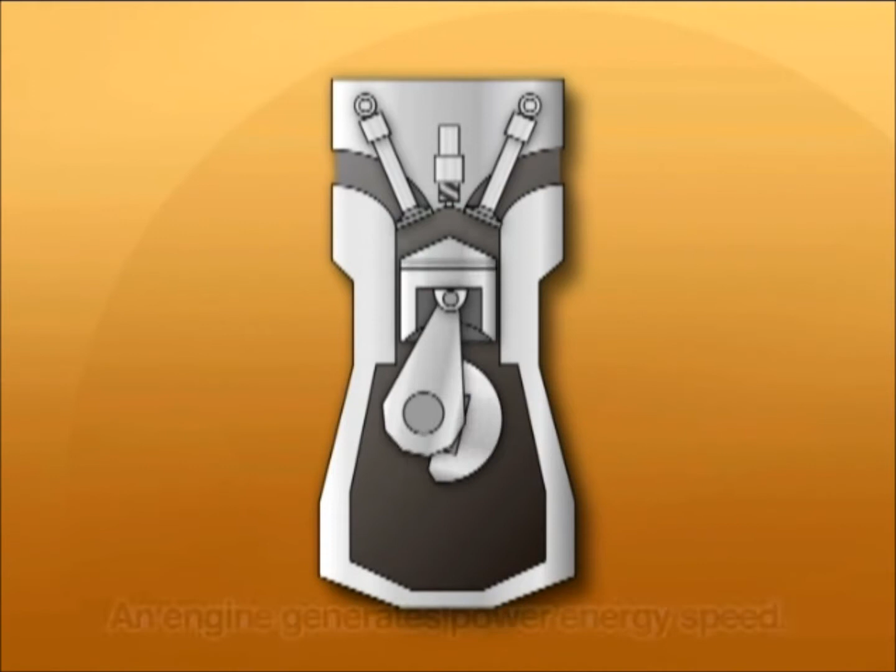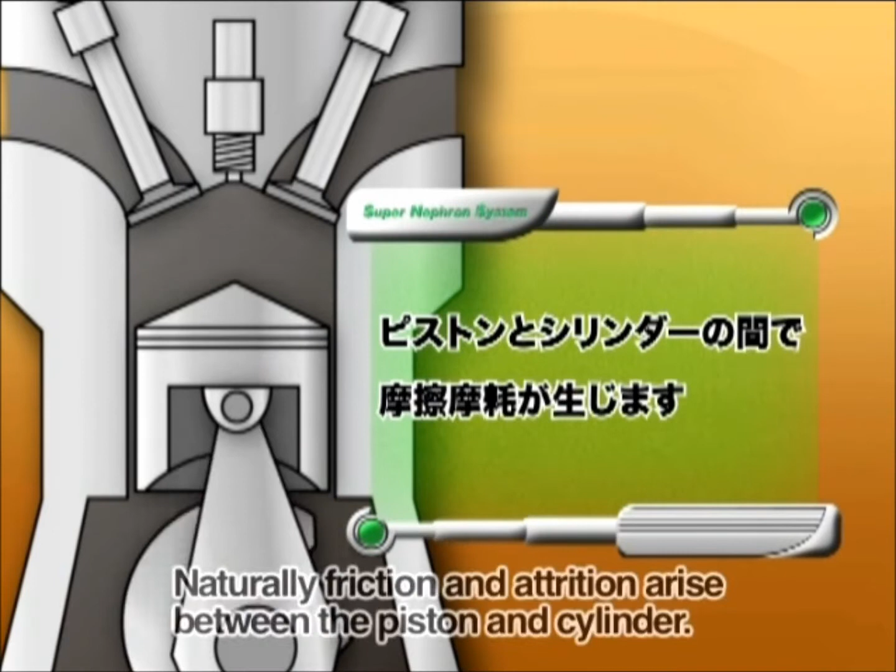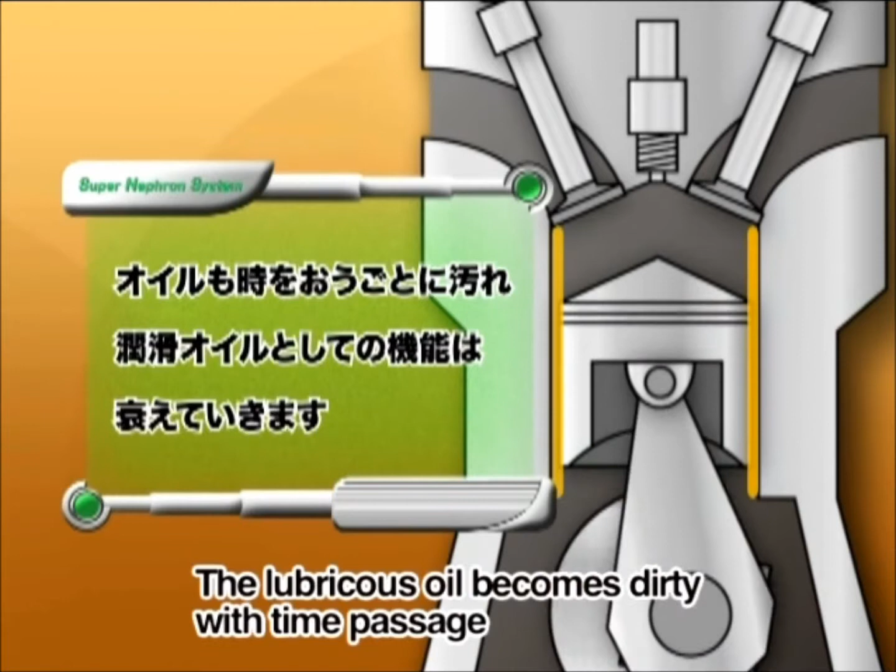First of all, we explain briefly about the role of lubricant oil. Engine generates power energy as the piston inside the cylinder moves upward and downward at the high speed. Naturally enough, the frictional wear occurs between this piston and the cylinder. Lubricant oil plays a role in reducing the frictional wear. Lubricant oil becomes dirty over a period of time and leads to functional decline. For that reason, the continuous use of unclean oil wears off and damages the inner part of the engine, and that deteriorates fuel efficiency and declines power performance and finally leads to engine breakdown.

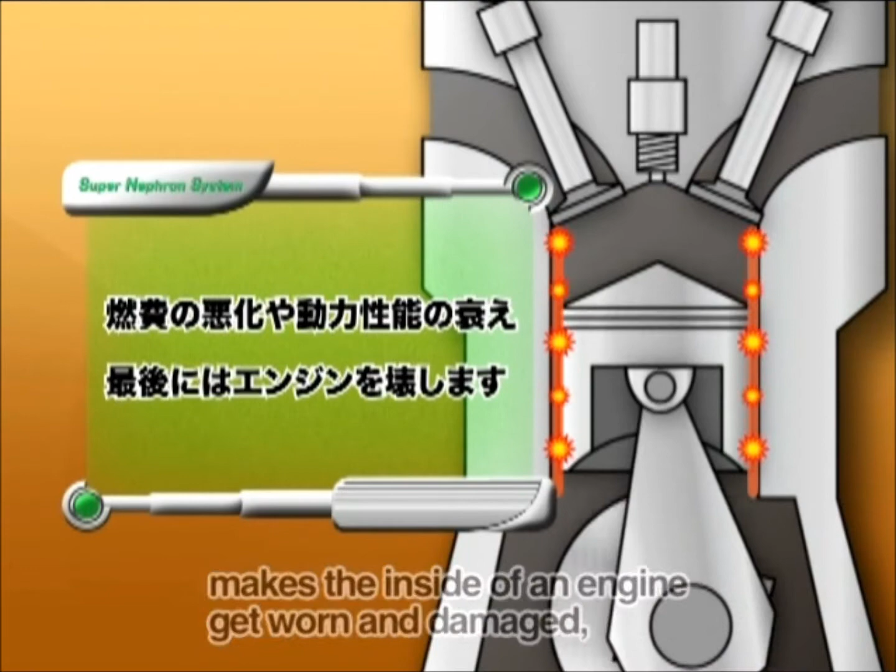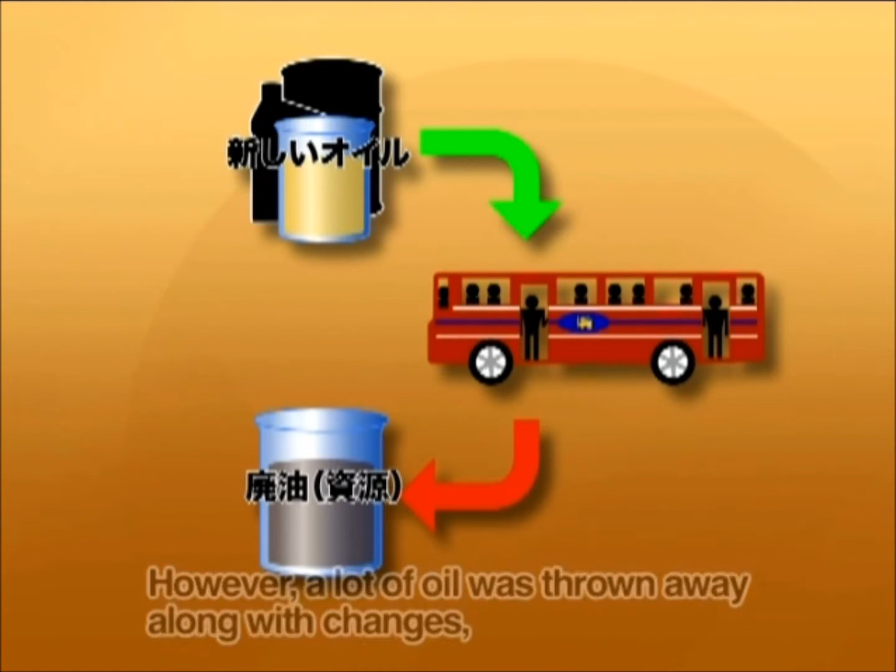In conventional system, lubricant oil change is carried out regularly in order to prevent such problems. However, by doing that, large quantity of oil is thrown away and it becomes financial as well as environmental burden. Super Nephron system clears such large quantity of discarded lubricant oil to zero, and yet it produces the most suitable lubricant oil for engine.

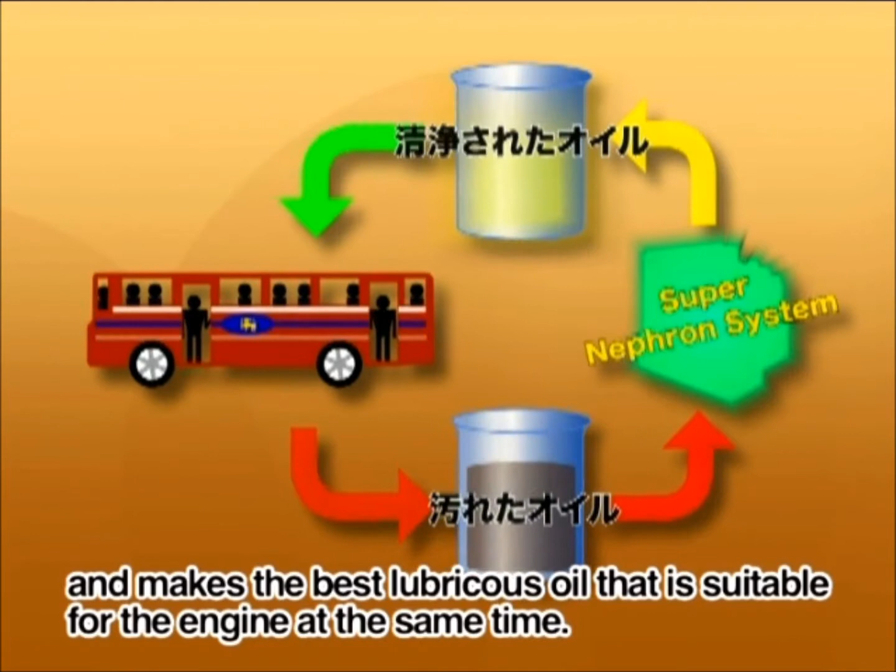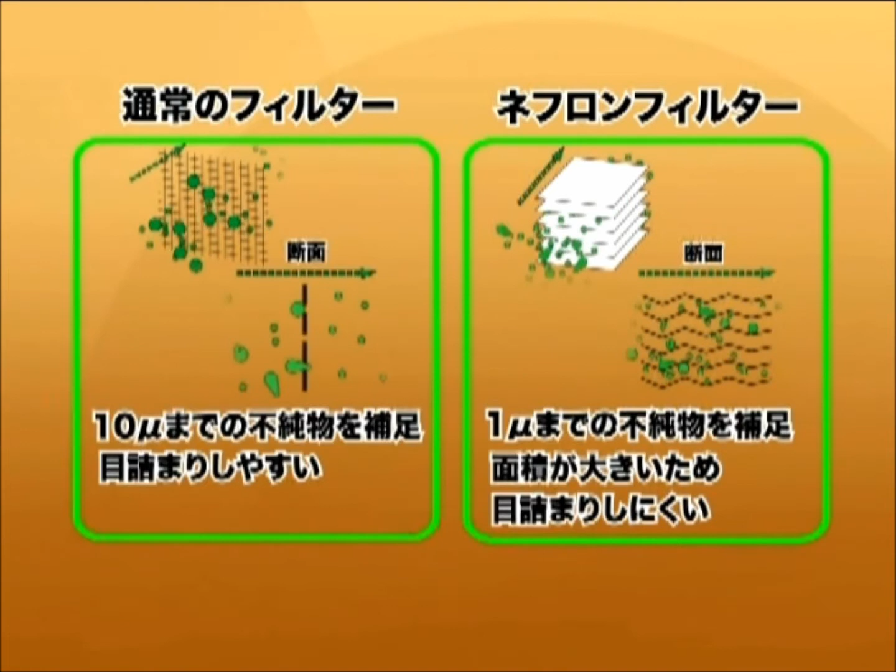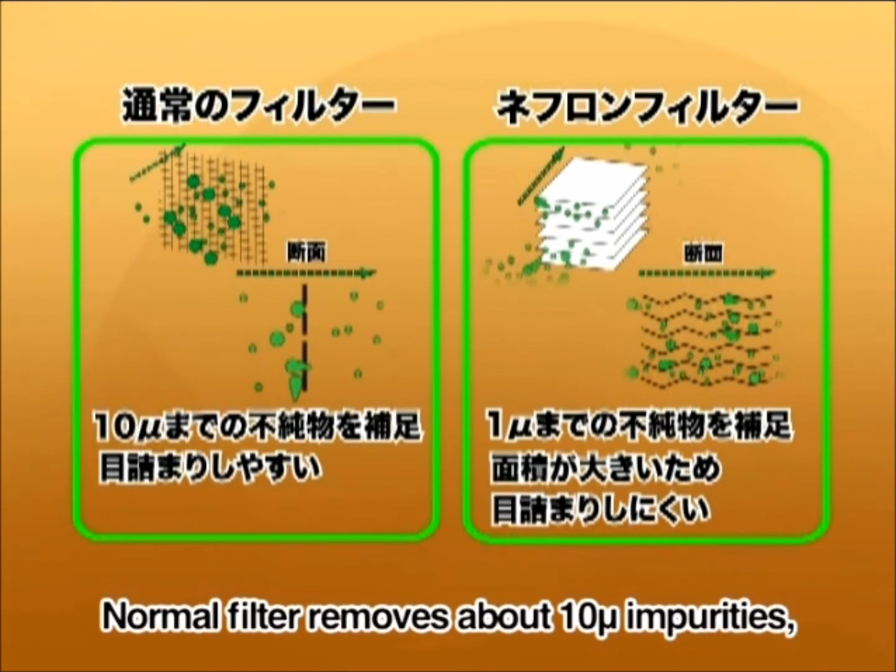In Super Nephron system, application of special filter makes it possible to remove impurities down to 1 micron. As ordinary filter is considered to remove impurities about 10 micron, it shows that even considerably tiny impurities can be filtered. Reflecting on micron now, although it is likely to be considered 1 micron is 1/10 of 10 micron, 1 micron is in fact 1,000th of 10 micron. Therefore, the filter of a Super Nephron system can filtrate impurities of the size of 1,000th that ordinary filter can do.

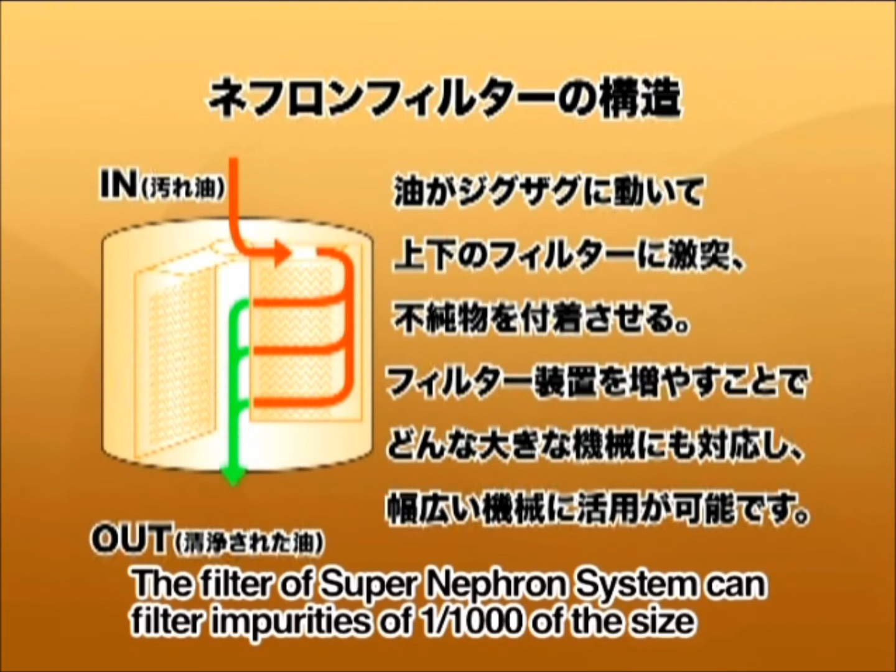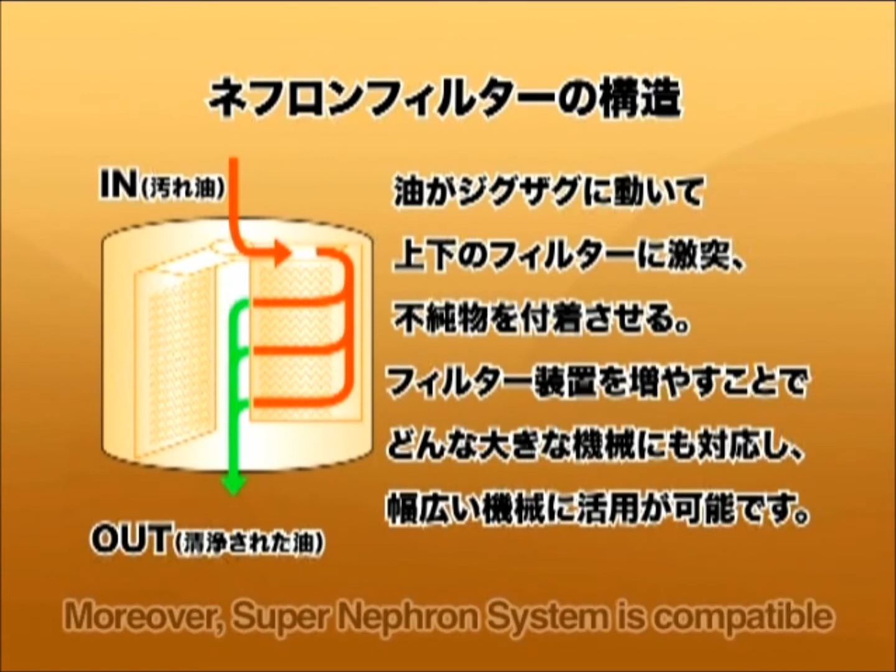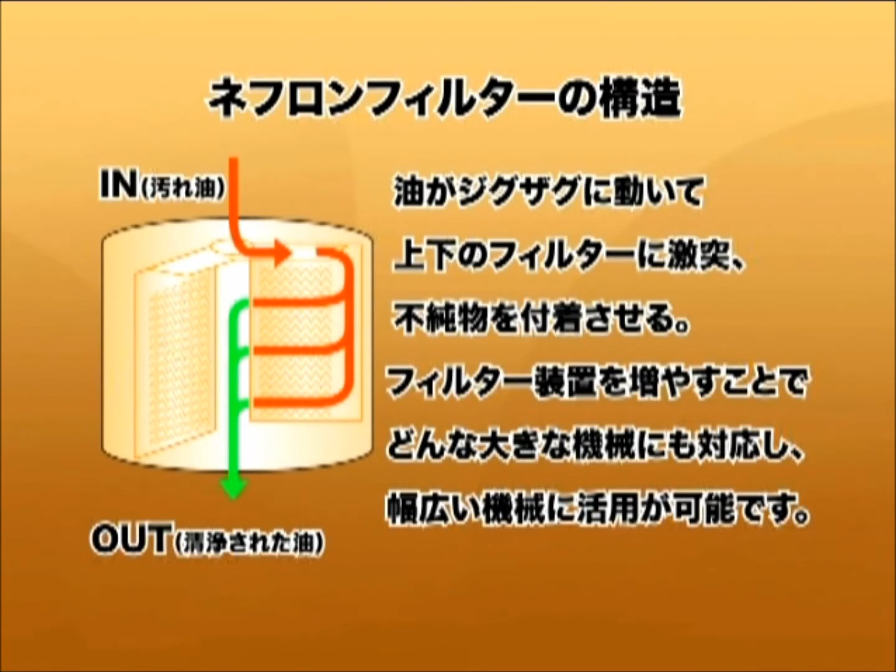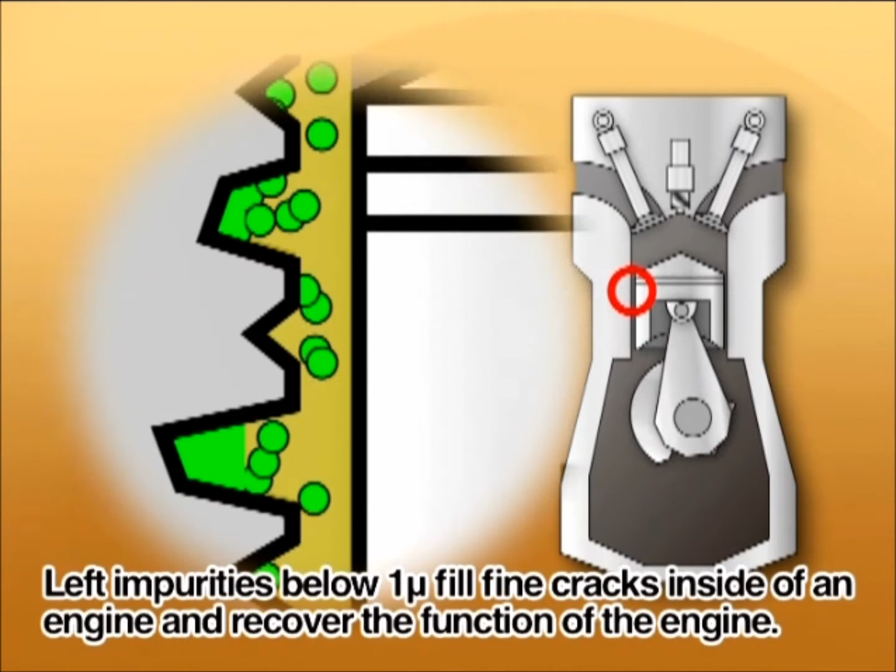Furthermore, as Super Nephron system becomes compatible to any large machinery by adding the number of filtering devices, it can be utilized for a wide range of machinery. There is a reason for leaving impurities of less than 1 micron in the recycling process. By leaving impurities of less than 1 micron, those impurities will fill the small damages inside the engine and restore its functions. This is called miracle 1 micron and is the reason for being said to produce the optimal lubricant oil for the engine.

There are 5 distinctive features for Super Nephron system. It brings full efficiency back to brand new vehicle condition as much as possible. It saves carbon dioxide substantially by sharp reduction of engine oil and fuel. It implements cost reduction as well as zero waste oil. It extends the engine life dramatically since wear does not occur inside the engine. It improves the accelerating and braking performances since the engine works highly efficiently.

As these researches and performances have been recognized, 26 patents and 1 utility model have been obtained. By taking advantage of these distinctive features, Super Nephron system eliminates waste and contributes to the realization of the environment-friendly society. In spite of the fact that this environmentally focused and earth-friendly system has been viral, interference by oil capitals and engine manufacturers makes it difficult for this system to go into markets.